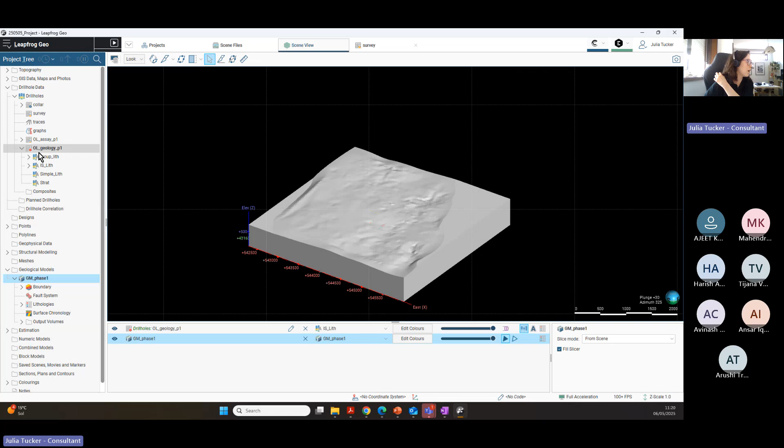We have seen yesterday that we can input our data and then we can start to visualize it. And by the visualization, we can also find a bunch of mistakes. So we can see that we have a problem, an error that is being called right here in the OL geology. If we open it, this error is attached to the lack of information right here.

So for us to take a look here, we can just unvisualize the GM phase 1, or we can take it out. So if we come closer, we can check out that our problem is on our drill hole OL14A. You can just click here and you will see that it's the OL14A. And what we know about the OL14A is that it's the one where we also had fixed the survey. So the problem is about the lacking of data right here.

But we can also see that this is a survey deviation that is not making sense along with the other deviations that we have. So we are going to take a look directly on the survey. Opening the survey right here, we can see that there is a segment from the OL14A that was ignored. So we are going to untick it and save it.

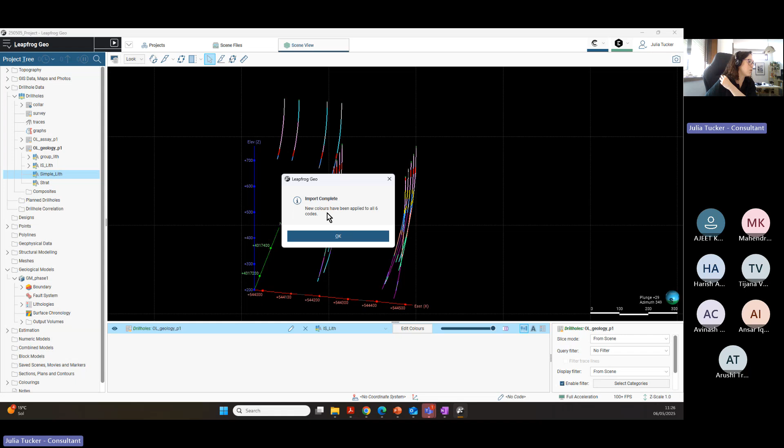Now we have new colors imported, and we are going to do the same for the simple lithology. So we are going to right click on simple lithology, colors, and import. And we are just going to click on simple lithology and open. Import is complete, the new colors have been applied to all the 6 codes.

So what that means, you could see right here that we could also export it. So if I had settled a right pattern of colors that I wanted, I just needed to come right here, right click on it, export it, and then I can move that along with my project. So if somebody wants to have all the same visualization as me, it's possible and pretty simple to do.

So now that we have checked already what we have here in terms of errors and grouping and selecting, now we are going to finish our interpretation because we have now finalized all of the drill holes, and we just need to see on the legend what we have and change right here to the stratigraphy, editing the colors, make everything visible, and just clicking on the OK.

Why? Because now we are just going to click on the cylinder. And by clicking on the cylinder, I also wanted to mention that we can select categories, select the line radius. So let me change this for you to understand what is changing. You can see that the radius of this cylinder is way bigger, and this is some of the functions that we will have for this kind of visualization, to make you understand better your data.

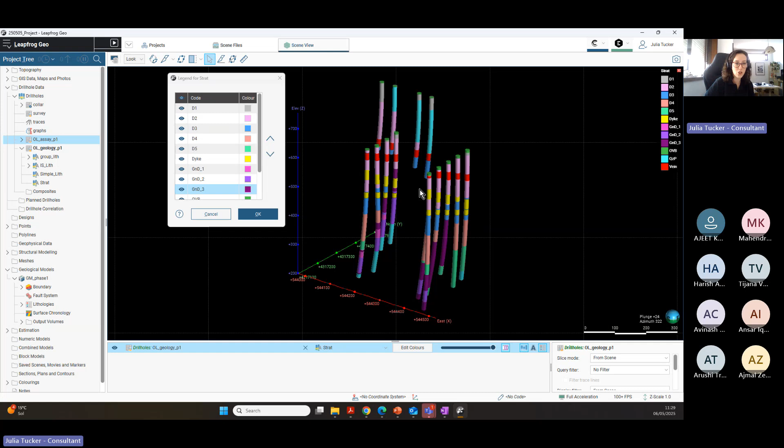So we know that the granodiorite should be together. So that's why we have already advanced to our new lithology, that is the grouped lithology. And now I'm just going to insert everything for visualization. Always remember to do that when you are dragging back anything from your view. Why? Because if you or another person is going to open it afterwards, it may not have the full visualization and keep wondering why, and it's going to be just a matter of viewing.

So just clicking on the OK, because now we are going to take a look at the grouped lithology. Why? Because we have here the grouped lithology, that is our model already interpreted, if we look this way, interpreted by the granodiorite. So we have done a step that was interpreting one group of lithologies. If we wanted to group another lithology, we would do that in the same column.

If you don't remember what I have done yesterday to group that, we just came right here to the geology, new column, and group lithologies. So if I click right here, I would just need to input the source that I'm taking from, and we could group this lithology. So after that, we have checked the interval selection. And why is the interval selection important? Because now that we are seeing the grouped lithology, let's just take a look at the colors again.

Why? Taking off the overburden. What is the overburden? The overburden is this first layer. So we are taking off the overburden just to understand that the youngest lithology that we are seeing here is the overburden. And this information is important. So be aware that if you are trying to do a new model, you need to interpret your data also so you can build what makes more sense.

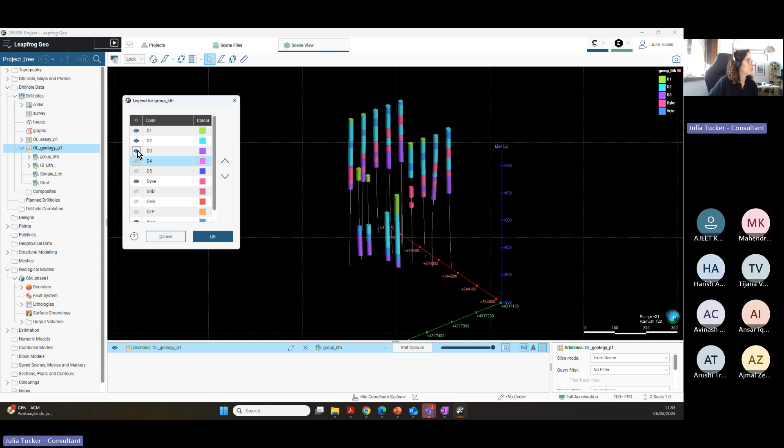And now we can just take out the granodiorite because we know that was already interpreted. And now that we have taken out the granodiorite, we can take out the stratigraphical sequence that we have here. That is the D1, D2, D3, D4, and D5. And what we have when we got this, we have a vein and a dike.

The dike I have already mentioned yesterday, this dike right here, it will need to be split, right? So when we are talking about a modelling that will need the dikes to meet, we are going to model it as two veins in a vein system. So this vein right here is just a single vein. And this one right here, we are going to model as a system of veins.

And how we are going to make the program understand that we are doing these two different dikes, we are going to do that by the interval selection. So now I'm just going to take everything out here because we are going to open the interval selection. So when we right click on the interval selection right here that we created yesterday, we have our toolbar again of selection. So what we are trying to do here is just to select what we want.

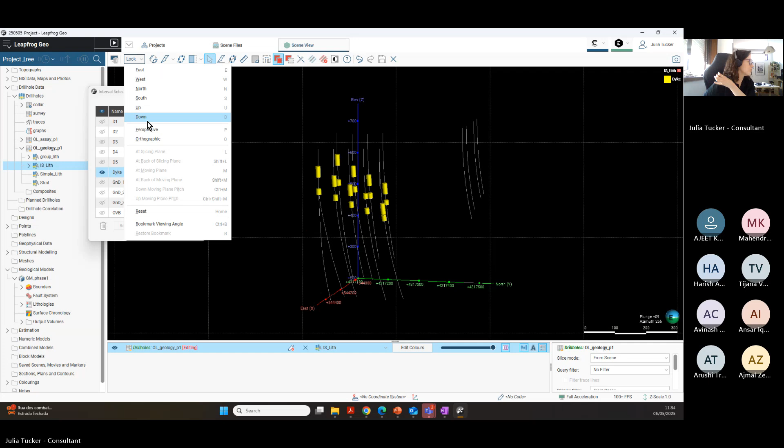So to do that, let's just visualize what we want. And we are going to visualize just the dike. So we have here the dike. And what we are going to do now, just pressing D, we will be able also to make a slice. So I had pressed D and now I am drawing a slice. So on my slice right here, I can see exactly what I wanted to select.

So what am I going to do? I am going to click on the selection by line. So I'm going to select these intervals by line. So I'm going to select this, this, this, this, and this. You can see that this is a straight line. So we had selected. After selecting, we just need to come right here, assign to.

We are going to expand the assign to, and we are going to create a new lithology. And this new lithology is going to be called dike 1. So the vein of dike on top is going to be our dike 1. And we are just going to click on the OK. And now that we have selected the dike 1, let's select the dike 2. Now, the same process, assign to, create a new lithology, and this one is going to be the lithology dike 2. And we are just going to click on the OK.

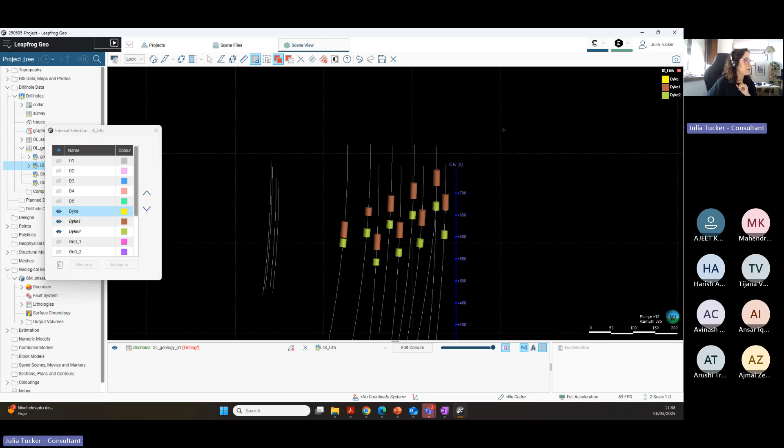So before I save it, I just want to be clear that everyone was able to select the two bodies, and there is no doubt on the toolbar right here that we are seeing. So if you want a wider line, you could just press right here. So just carry on. We just need to save it. So now just saving it, and we can see all the visualization again.

So now what we have right here, we have a simple little grouped interpretation lithology. And this interpretation lithology right here has two different dikes. That is what's important for us. So this interpretative lithology right here has our two dikes. So is there any doubt until this moment? I just want to be sure that you are all following along.

Yes, Julia, so hi. Yeah, it's fine till now.

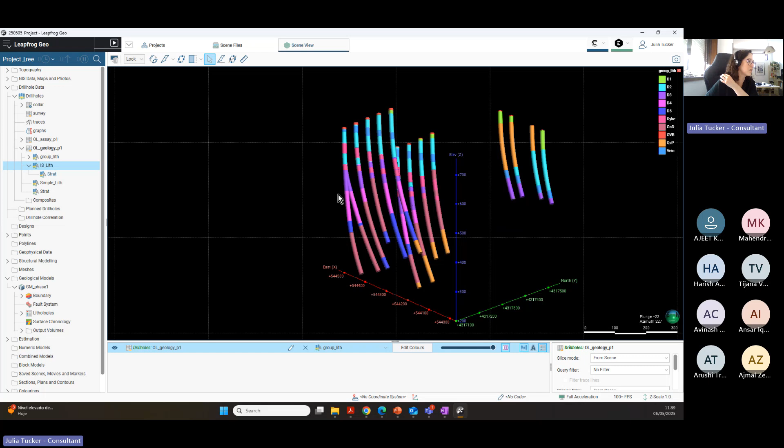Okay, so now you have realized that we did a grouped lithology, and on this grouped lithology, we had our granodiorite together. And right here in our interpretation lithology, we are not having it anymore. So how could we fix that? We could do it over again. So we can do a grouped lithology and afterward do the interval selection all over again if this is what we want and this is the result that we are trying to get.

So we are just going over here because the stratigraphy, the interval selection right here, oh, sorry. This is something that I wanted to mention with you also. You are going to have in general 24 hours for your connector. So it had opened here for me to make the selection again because it had reached exactly the point that we had started yesterday using the license. So I just need to input here the get started and done. We have here our software open again.

So now let's come back to what we were talking about. The interval selection that we have done right here is based on our pure stratigraphy. So that means that we don't have our granodiorites grouped together. So let's do it all over again. We are going to delete the interval selection to redo that. And on the grouped lithology, we are going to take a look and see if our granodiorite is totally together. We take the visualization of everything and input the visualization of the granodiorite. So we have this already done, and we just need to click on OK.

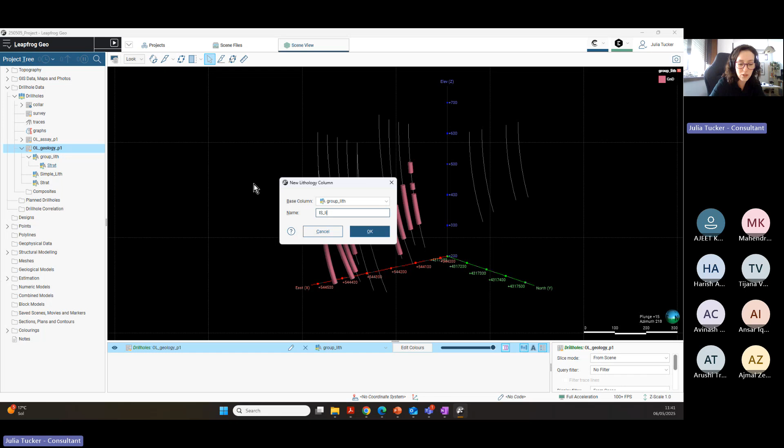So on the OL geology, we just need now to do the new column, in this case the interval selection with the base column being the grouped lithology, and the name is still the same, the interval selection for the lithology, where we are going to make the selection of the dike. So this is another opportunity for you to do the interval selection of the dike. Why am I saying that?

Because I know that it sounds pretty easy when I'm doing it here, but this is something that you need to practice a little bit. After you get how to do the selection, you will see that this is way easier than QGIS or any kind of GIS selection tool. You just need to practice the slicing because we are seeing everything in a 3D environment. You need a certain practice to understand, when you are drawing something, what is happening to this drawing, what is actually splitting or not splitting. So that's why we are going to do this workaround about the interval selection all over again, because you're going to use that a lot of times.

So what we had to do right here to start our interval selection: see only what we want to select. What we want to select, the dike. So now we have these two sets of dikes, and we know that the first one belongs to one body and the other one belongs to another body, that we want to be veins that are bifurcating from the same place.

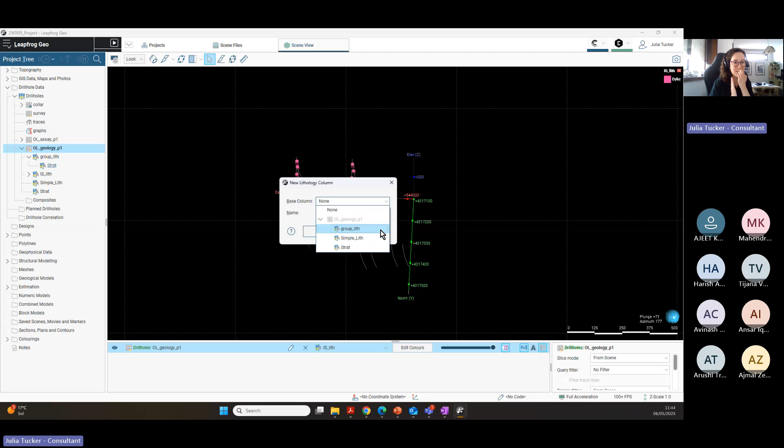Actually, license expired. Sorry, I have to start again. Yeah, it's the same. That's what I was showing you. We will all get this at the same time, because it's made for one day and to be renewed by day. So yes, we are going to get the expiration all at the same time. I just received it now. You will need just to open the connector. Yeah, I'm trying to open it again. No problem.

While you are opening there, I'm going to carry on with the interval selection, but we can come back because I think that your problem was right here. When you were doing the new column for the interval selection, you probably had put on the base column just the stratigraphy, and we need the group lithology. So, we can continue.

So if you double click on the interval selection right here, how are we going to see just the dike? It's here, this little eye. Are you seeing? We untick and we can see everything at once, but we are going to untick this and just tick the dike because we want just to see the dike. Were you able to do that part?

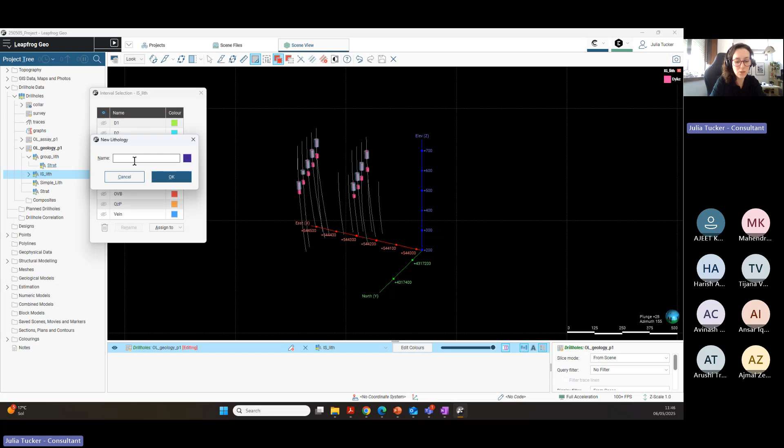But if you want to do that in a more conservative way, take a look north—oh, down, sorry, you are seeing down. Now that you are seeing down, you want to split your vision. And right here on the slicer, you can see you are just removing the front.

So you are coming back to your project, looking at east, and just select what you want, remembering that what is on top is going to be dike 1 and what is below is going to be dike 2. Now I'm going to assign it and it's going to be dike 1. And just click on OK.

And now we are just going to change this view from remove the front to remove the back, and we are going to select our dike 2 again. So after we've done that...

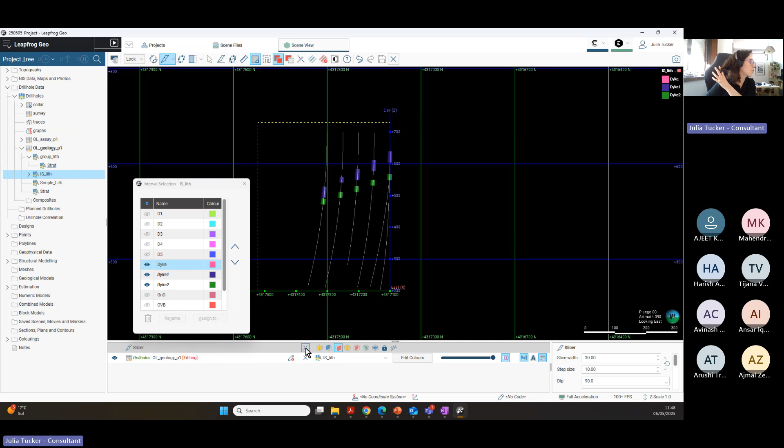Now we can see that we have what is necessary for us to be grouped, and we have what is necessary for us to be split. Now we can actually start our surfaces. This is a very important part to start our geological model.

As I showed yesterday, we need to understand how our model is separated into surfaces. So the base lithology column right here is going to be the interpreted lithology. The surface resolution we are going to leave at 30. The enclose object is going to be the assays.

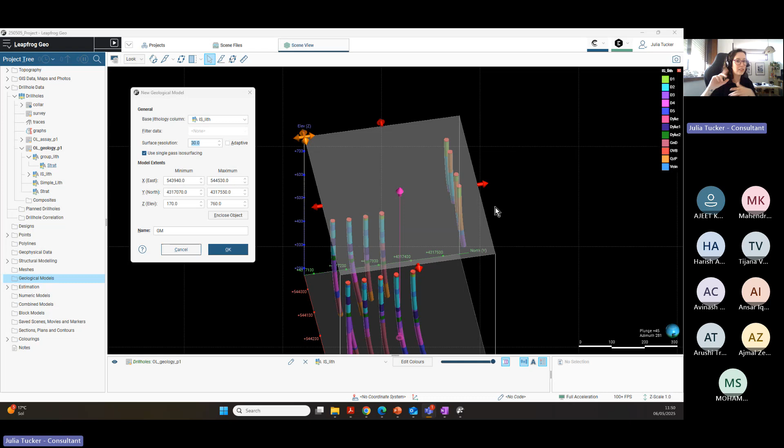So what we are seeing now is that the assays are the boundary, really close to our data. This is the best way for you to start modeling, because when you're starting, you are going to do several surfaces that are first pass surfaces. The closer you are to your data source, the easier it's going to be for you to understand and interpret if the program is taking the right direction.

So we have already set our surface resolution to 30, but now we just need to check: does it make sense for us to set a resolution of 30? How much space do we have in our lithologies?

So yesterday we constructed this new geological model. If you have not changed the interpretation here as I have done, you will still have the geological model—it's basically the same. We have to choose a base lithology column, and this decision right here is very important.

So we have already made a lot of new characterizations in our lithologies for us to be able to model it better. What that means is that it's no longer just the stratigraphy, it's the interval selection lithology—the one where we grouped the granodiorites and split the dike.

So the surface resolution right here we are just going to leave at 10. One thing very important to mention: every time you reduce your resolution by one, you increase your processing time by 4. So the ratio here is 1 to 4—one unit less on your resolution means 4 times more processing.

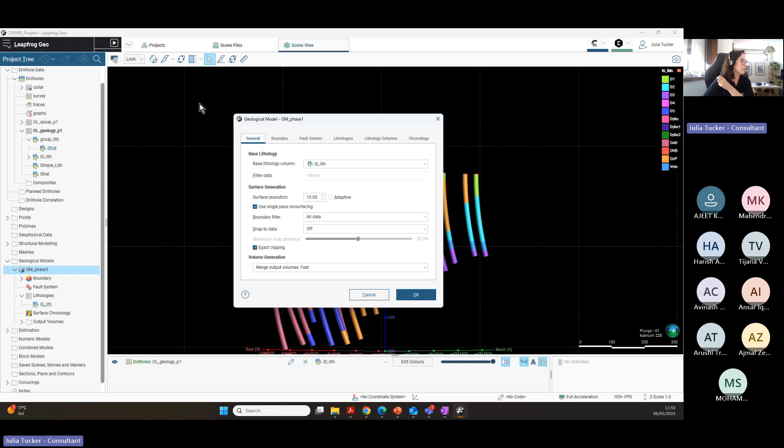You can see that our lithology right here is our interval selection lithology. That was the one we have selected for our model. If you double click on top of your model, you will have this window right here, and this window is extremely important.

We are going to start doing our surfaces, and they have to be chronologically correct. That means we are going to create surfaces, and then input these surfaces in the right order. If we have a background lithology, we are going to insert it right here, and if we need to change it, we use these two arrows right here.

So the lithology columns are from the interval selection. The lithologies are the ones we have checked. We have dike 1, dike 2, and the granodiorite all together.

We don't have any fault systems, but it's important to be aware that if you have a fault system, you could insert it here on the meshes. We could start as a polyline if it's marked on a geological map, and then go from meshes and call it a new fault.

It could be from a polyline, from base lithology, from other contacts, from GIS vector, from points, or from structural data, so if you have structural data on disks, or from a surface. Those are the several options you have to insert a structural system into your geological model, but we are going to start with our surface chronology.

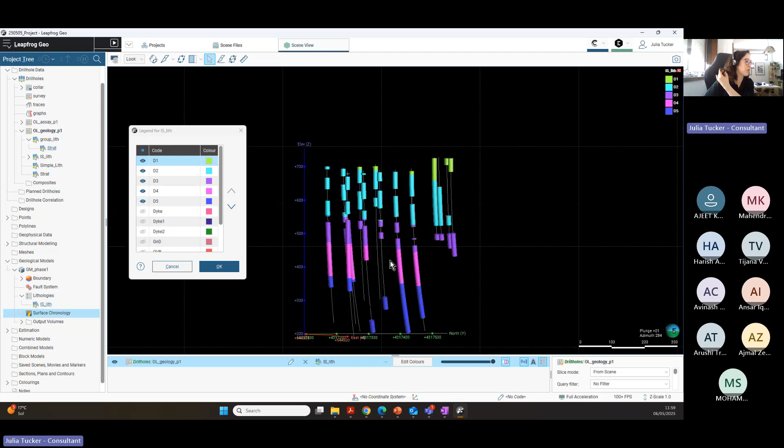Now let's talk a little bit about the golden rules that we have for modeling, and after that we just need to start. So the tips I would have for you when modeling in Leapfrog, first of all, these rules are very important to be followed. If you don't understand any of them, just ask me again, because if you don't follow them, you will have problems in the future.

So it's the same thing I was telling you about the errors. You can ignore the errors for a while if you're just trying to follow your workflow, but be aware that at some point you will not be able to carry on anymore. You have to sort out your first errors. So these are the tips we have, the 5 tips we have so we don't make errors in the surface creation.

First of all, do not generate duplicate points during the modeling process, as this will likely result in erroneous models. We'll discuss this in more detail, because when we are constructing the surface, it's possible to see how many points of contact they have. But why is this important?

Because when we are working in an environment with intrusive, potentially cross-cutting units like veins, dikes and intrusions, it's very helpful to start building your surface from the youngest to the oldest, so the cross-cutting relationships are honored. By building the surface from the youngest to the oldest, we avoid generating duplicate contact points. So following this rule is very important.

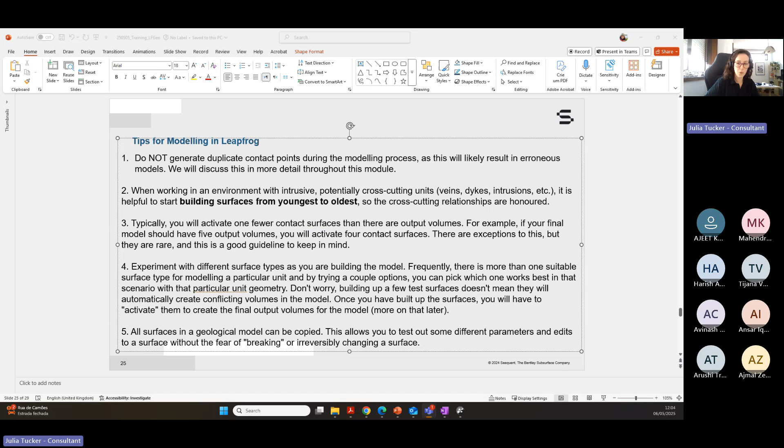Please tell me if you have any doubt. Sure, Jimmy. Oh, sorry? Sure, I said okay, sure.

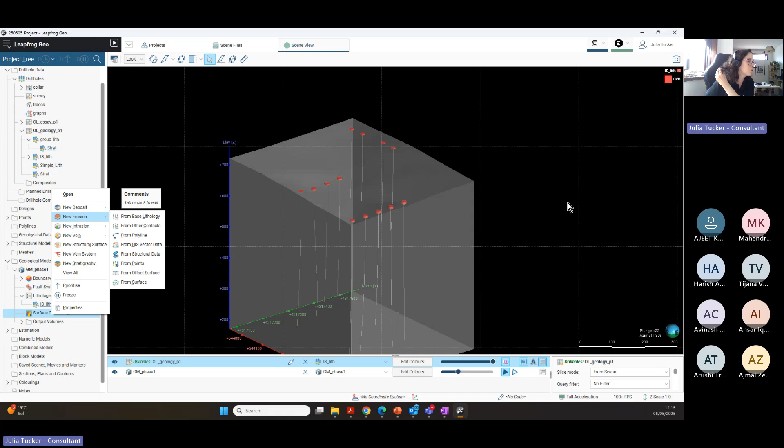So since this is an overburden, we could create this also as an erosion. If you want this to take a little bit of the other lithology that is coming previously, we could have done it with erosion. But we are going to build here just as a deposit. I'm just thinking if it's going to make more sense as an erosion. We are going to build as a deposit from base lithology, and our primary lithology right here is our overburden. So we are going to input overburden and select use contacts below.

So right here, you can check the amount of contacts that those lithologies have with the overburden. So we don't want to duplicate those contacts anymore. We could input lithologies on the ignored list if we don't want to make contact with those lithologies anymore, but we need them, because the overburden is really on top of everything and it's really making contact with everything. So we are just ticking the use contacts below. This is an important part. Be aware of use contacts above or use contacts below.

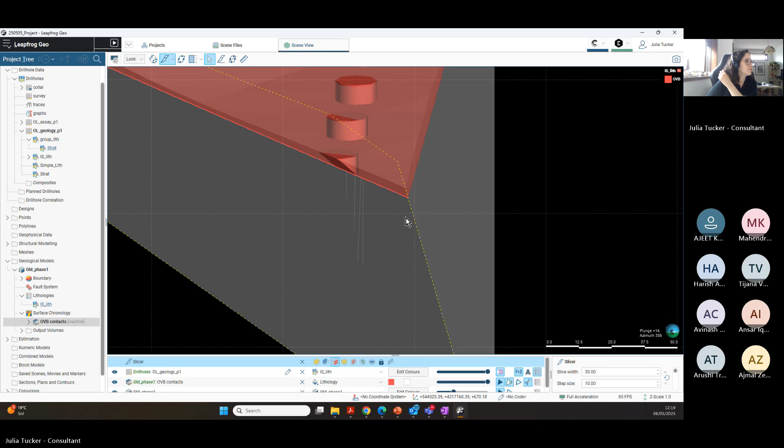So now that we have our overburden contact done right here, we could just import it. So when we import, just drag and drop, and we can see. So we can see right here, and we can try to get the slicer, and we can see right here that we don't have actual snapping to the data. It's way too little for us to see this way, but we could check.

So let me take out the slicer, and we can see maybe better here and right down here. The contact is not fully being respected. So what we are going to do so the contacts are respected, we are going to go to the geological model. We are going to double click on it.

And when we double click on it, we are going to go for snap to data. And our snap to data is going to be drilling only. And why drilling only? Because we only have drilling information here. If we want this to be based also on polylines, on editing tools that you have used, you can also input all data. But in our case, drilling only, and the maximum snap distance of 50 is okay.

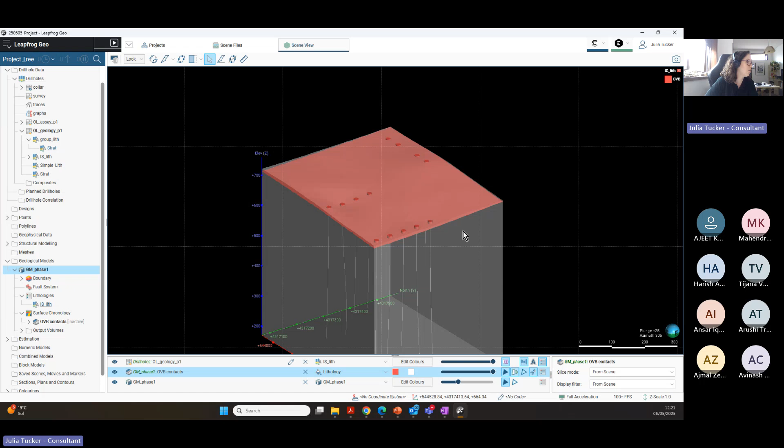If you want, you can input 100, and this way it will be more accurate too. So let's just input 100. The processing time is going to be a little bit longer, but at this moment our model is not that heavy. So we just need now to click on OK, remembering that the surface resolution is 10. So clicking on OK, and now we can see that we have everything way straighter. So let's just check the possibilities that we have right here.

So when we create a contact, we also create those little middle points of the contact that are going to make it easier for us to understand what is the middle point of it and if our surface is respecting our data right here. So these are the contact points. And we can also export all of those points and check the properties of it, seeing how many points we have, how much was the processing time of it, and who created it.

So if you are checking a project that you have a bunch of people collaborating on, and you're not sure who was the one that was actually creating all the features on Leapfrog, we can go to the properties and take a look at the history and see who was the one logged on the account at that time and what time exactly it was.

So now I'm just going to clean it all, cleaning all my screen because we are going to carry on. So you can see right here that this is in gray showing inactive. So for making this active, we just double click on the geological model on the chronology. But we still don't have all of our surfaces done. First, we will have all of them done, and then we will activate everything in the right sequence.

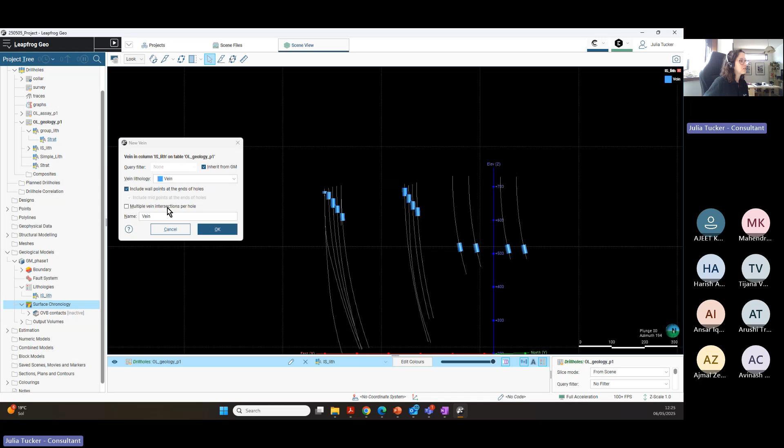So in our case right here, you already know we are going to get this from our base lithology, and in our case right here, our vein lithology, it's going to be the vein. So we are going to include the wall points at the end of the hole because this is important for us. But we know that in this case right here, we don't have multiple vein intersections per hole. So we don't have any kind of problem right here with folding veins.

So why do we have this option right here, multiple vein intersections per hole? Because we can have a fold, and this fold is going to pass more than one time in the same drill hole. If you want to project a fold geometrically, you can start visualizing that in Leapfrog too. So once you have already set the vein, we are just clicking OK.

And now we are just dragging this to the scene view so we can check how our vein is. So our vein is respecting our system, is respecting our surface, is respecting our overburden. And if we input the overburden and the vein, we can see right here the encounter of the two of them. And if we want to check if it's making sense, we can just see that with our data too.

Remembering this is just the surface. When we are creating the surface from a vein, we will have more options. So let's just take a look at the options that we have for the vein. So if we go here in the project tree and just expand the vein, what are the options that we have?

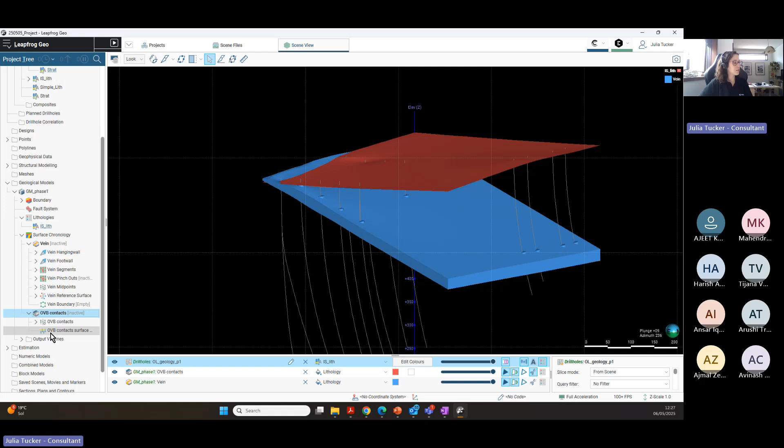If we compare right here, you could see that for the contacts on the deposit, we just create some points, and those are the points of contact and the surfaces created by those points. So if you want to edit these contacts, you are going to do it basically by the contact points. If you want to edit the vein, you will have several options for it.

So at first, I just want to make everything clear, but I'm not going to take everything out, just the overburden, because I wanted to show you a little bit what every one of those icons means. Why? Because they are important for you in advanced editing. So if we check right here, we have the hanging wall.

If we right click on the vein hanging wall, you can see that you can add more information to it. So if you have a hanging wall that you have more information on, you can do a first pass surface right here, and you can add points, add structural data and add polylines to make your surface exactly the way that you want. Also, you can just edit it. So we can call up the editing here.

We are going to have exactly the same toolbar that we have for the interval selection. And this way we will be able to create a polyline that will cut our hanging wall. We can also do the evaluations on the hanging wall and extract structural data from it. I just want to mention that everything is going to be exactly the same for the vein footwall. And one thing that I wanted to visualize is this. Let me just put a bit of transparency on the vein.

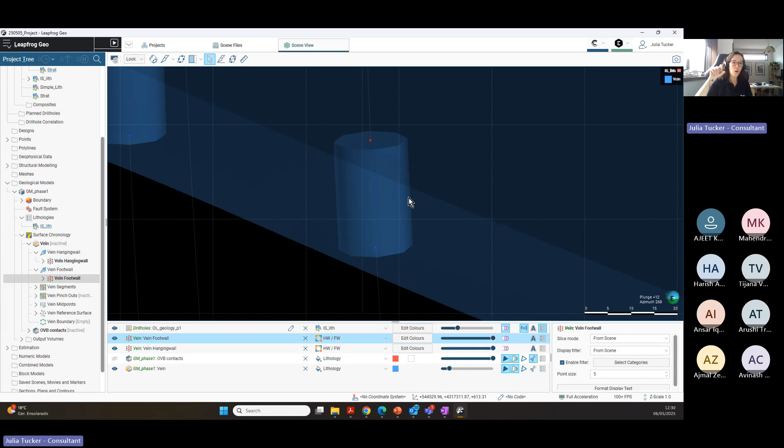So if this is folded, remember that this is the way that you are going to tell the program that this is folding. So if, for instance, you have two intersections right here, we would have to input the footwall, the blue, on top and the red below if we want this to make a fold. So just explaining here a little bit, this part that I'm saying right now is advanced editing.

So generally there are two kinds of courses for Leapfrog. We have one that is totally fundamental and one that is totally advanced. What I'm trying to do here is to merge those informations a little bit for you, because I think it's very important for you to already be aware of how you can do advanced editing of all of those surfaces, because it's pretty easy to do that. And as you can see, it's already available for you.

You just need to expand the vein and take a look at what you have right here. And what you have right here is pretty easy to understand too, because you have the hanging wall and the footwall.

If you are having any problem understanding, just activate your legend, which makes clear that the hanging wall is the red one and the footwall is the blue one. And if we want, we can also do the pinch outs if there is any pinch out in our vein, and also the vein midpoints, the references, and the boundary.

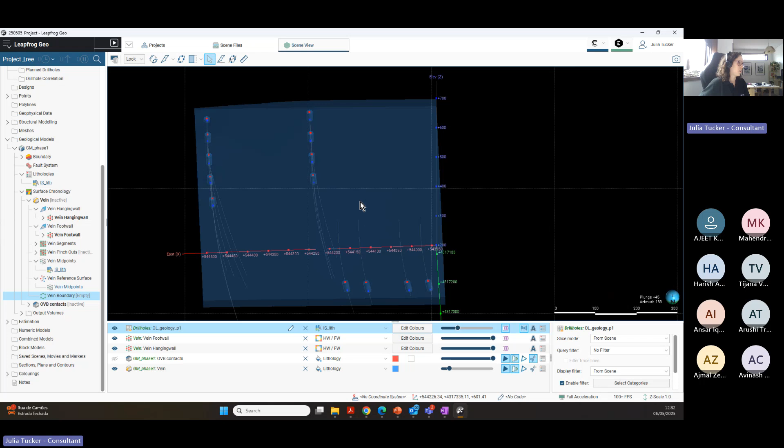Why the boundary? Because the boundary can be very important if you want to constrain this vein to a specific place. So if you come here on the vein boundary, we can also edit this with a polyline. We could draw a polyline here to indicate where we don't have data in our vein if we want to. For instance, we could edit with polyline, and clicking on that, you can see that something very similar to the editing appears, but this time we are just drawing a line.

So how are we going to start this? We are going to start right here, draw lines. Sorry. So if we are drawing a line, we can just come up here and click on D, so you will understand exactly what you are seeing. In this case, I'm just going to take out some of the things that I'm not using. I am not using the overburden contact, and we can just create any polyline if we want, and this is going to be our boundary afterwards.

I just wanted to mention that this is pretty simple and easy to do. If you need to keep your information pretty close to where you have the samples, this is the way you are going to do that. Afterwards, you just need to save it. I'm not going to save it because here it will be nice to have the total volume. But if you want to cut this, just save it and you will have it on your boundary. And you can also take this out if you want, just going to the boundary, right clicking and delete.

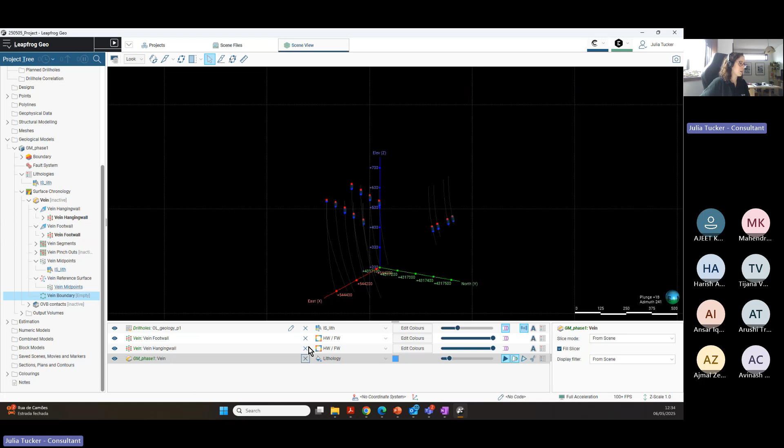So now that we have already taken a look at our vein, let's take a look at our next veins, because we have seen that we have two youngest: the dike and the vein. It will not matter whether we do the dike or the vein first, but we need to do the dike now because it will matter to do the dike before the other ones. So I am going to collapse our vein and also our drill hole data. If you find it easier, just come here and collapse all the rows. If you want to use the shortcut, you can do Control Shift left.

Now that we have our geological model expanded, our surface chronology, we are going to right click and create a new vein system. The vein lithology that we are going to insert here is the dike, and the outside lithology is unknown. Why? Because there are a bunch of lithologies here that could fit, so we can just leave it unknown. We just click OK, and we have a Dyke vein system. It's empty and inactive, meaning we don't have anything drawn on it, and it's not activated in our geological model.

Now we want to take a look at it, just by looking at our data. I had inserted a transparency here. Now taking out this transparency, editing the colors, and selecting just the dike and taking out the vein. So we have the dike separated into Dyke1 and Dyke2. At this moment, we want to build it as two veins, so we are going to build the vein Dyke1 and the vein Dyke2 under the same system.

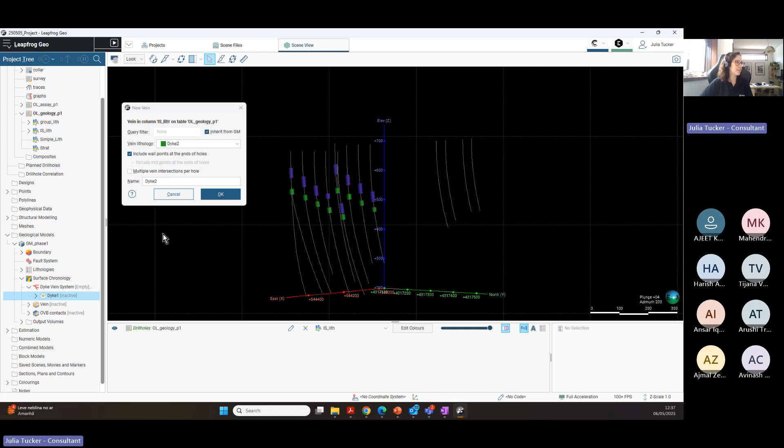So first of all, let's just check the Dyke1, making total sense. And now the Dyke2, exactly with the same configuration, and just doing the OK. So now we have here the Dyke1 and the Dyke2. And we could see that those are interacting with each other, right? So

what does that mean? That means that when we have something that is interacting, is very narrow and is interacting with other lithologies, we are not just building a vein, we are going to build a vein system. Why? Because now I can click on Dyke vein and I can go for the vein system. So when I do that, I can create interactions between those veins.

And this way, I can say that the Dyke2 is ending on the footwall of the Dyke1. So the Dyke2 is ending on the footwall of the Dyke1. So what we could do right here, we could insert this interaction. We just need to click on them, and then click on the plus right here, and we can see the interaction type. And we are just going to expand a little bit so we can check what it is.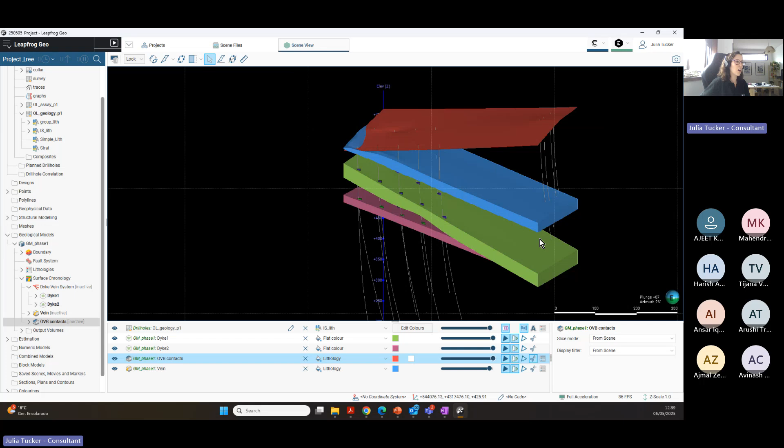So now that we have this right interaction between them, let's just check against the vein that is with transparency and with the overburden contact. And now we are starting to see our model already being completed. So it's already making some sense. And now we just need to understand what we have missing. So we have already done the dike 2, and the vein and the overburden.

So let's take this out. I'm going to take out the vein, the dike, and the overburden. So we can see right here that we have missing the granodiorite and the quartz porphyry and the stratigraphical sequence. I am taking out the stratigraphical sequence right now for us to understand what is coming first, if there is any porphyry that seems to be coming before the other, and it's not. This is another case where we could do both of them. It would not matter if we do the quartz first or the granodiorite first.

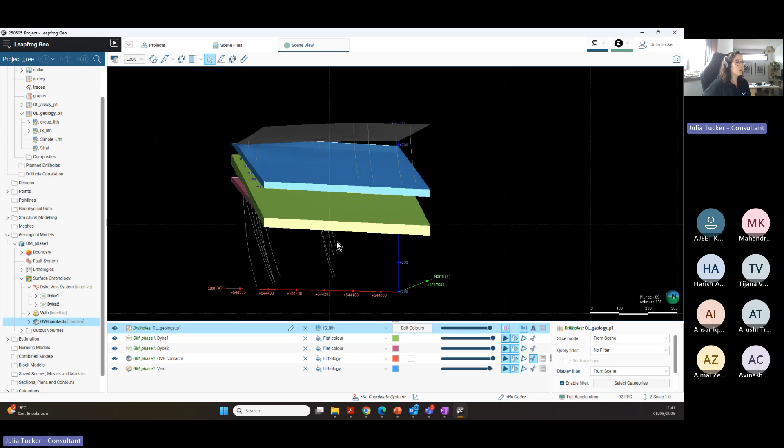But this is to mention to you that we need to take several decisions while we are doing our model, and we need to be smart. We need to think as engineers, as geologists, and take a look at the logic of what we are seeing. So here we have everything already modeled up to this moment, and now we are going to go for our granodiorite to be modeled. So I'm just going to take this out, and we are going to activate just the granodiorite so we can look at how this is modeled.

So we have already done some veins that are not active, but they are cutting right here, and the program has already understood it since we have already done it as the first lithology. We just need to be aware that when we are inputting that on the chronology, we are inserting the vein and the dike system in the same category of importance. So just clicking here on the OK, we are doing the surface chronology now, and it's going to be a new intrusion.

Sorry. So we have here the granodiorite as an intrusion, and we can do this from the base lithology. And in this case, you know what? Hello? Oh, so we are going to start actually with the quartz porphyry, because the granodiorite will be a little bit more important for us. I wanted to show you a little bit how we could make it together with the plane.

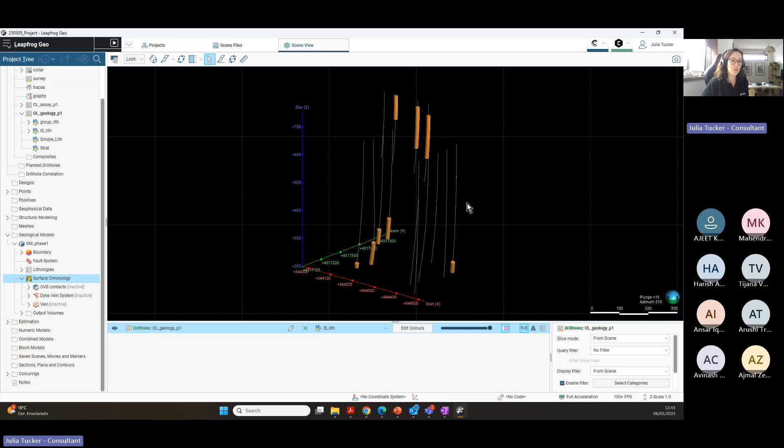So we are going to start visualizing here the quartz, and that's it. We are probably going to connect these two bodies. Let's see what the program is able to do for us in a first pass surface. So we can see that right here we have a kind of data that is sparse. So maybe the program will build just two different bodies, and we know that this is coming together.

So now that we have already understood a little bit about our surfaces, we are going to create our intrusion surface from the base lithology, and this one is going to be the quartz, and the exterior lithologies that we will have, they should not be the youngest one, so we need just to separate everything, ignoring the youngest ones. The newest are the dike 1, 2, the overburden, and the vein. We have everything here, just want to check if everybody's following up. We still have not done the GND, which is the granodiorite, so we don't need to worry about it.

Now we just need to click on OK to check what we are going to have as a first pass surface. This is a point where I wanted to take a little bit of attention, because we have created here two different and separated bodies. So what I want the program to understand now is that this right here, it's connected.

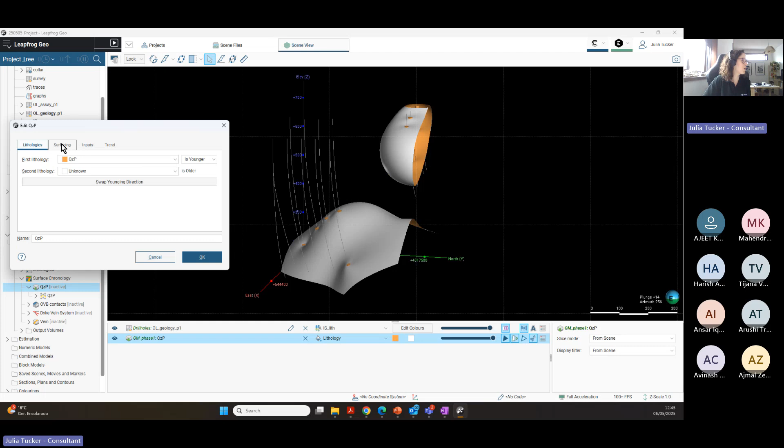So let's explore a little bit the QZP and the options that we have. We can open it, and just taking a look on it, we can see the second lithology. This is not the place where we are going to solve our problem. We can see the surfacing. So if we have any kind of problem with the snapping or how the geometry is behaving, we could take a look on this. We are not going to do that right now.

So we have the inputs and we have the trends. The trends will be our way to deal with that, and we are going to do that by setting a plane. So we are going to set from a plane. We just need now to visualize this plane, and we just need to come right here and start to draw this plane.

What we are going to do with this plane, we will try to intersect it in the most points that are possible. So what we are going to do, we are going to take out a bit our surfaces, because what I'm trying right here is to get everything from my data. So all of my drill holes, if possible, that are intersecting my porphyry.

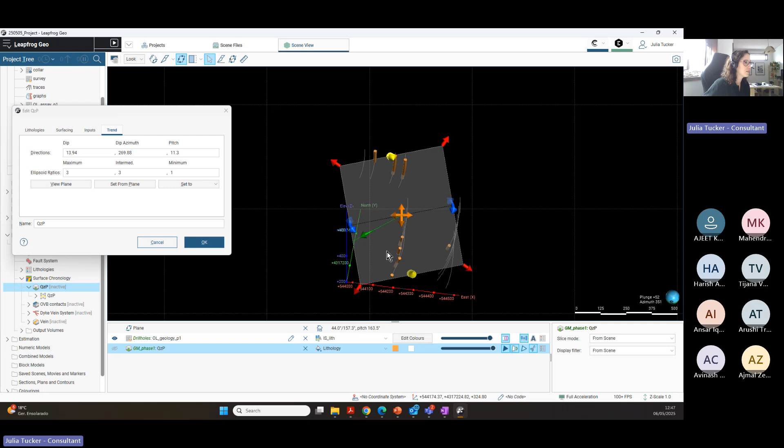Setting a plane is generally the best way that we are going to find to make something in the right direction that you want, because this way I just need to catch this one that it's a little bit lower. So this is the moment where you have to change a bit the angles right here and expand a little bit just to make everything be touched.

So my last problem right here was this tiny little one that is on the right, and now we have everything selected and we can expand it. Just this last one, and now it's almost done. I just need to intersect this last one. And done, now we have everything being intersected.

So we just need now to set from plane, and we have already the plane set. Please just tell me if anybody had any doubts right here. For setting the plane, we can just go right here, or we can come right here and input the set to if you have already a surface that you want to follow. So set from plane is already done, and now we can just click on OK and see the processing, how it's going to happen.

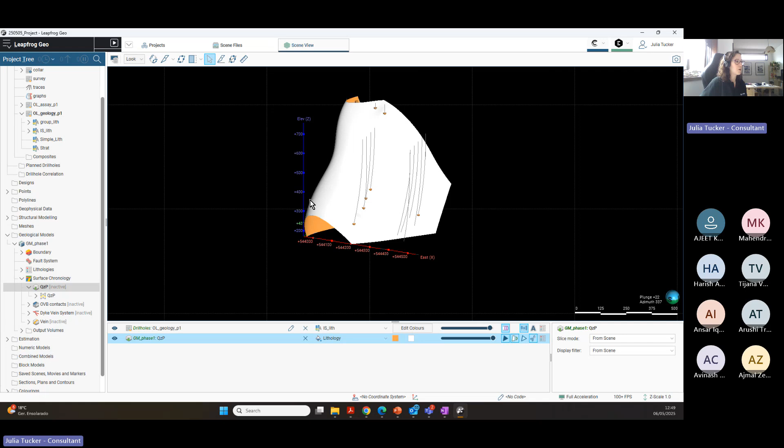So we have here now our body all connected. This was exactly what we were trying to reach, because we want this to be fully connected right here. So this is a whole body.

Now that we have learned how we are going to connect this, I just want to show a little bit the advanced editing. So if you open the intrusion again, we can go for the surfacing and do the additional options. On the additional options, you will have the value clipping and the interpolant. This part right here is more advanced because you need to understand more of the statistics. So you need to understand first of it, the base range, what that means.

The base range is going to be basically the distance between two data points, the double of it. So if you have, for instance, right here, a distance of 60 meters, that is what we have right here, we will have 120 of base range. Our total sill is going to be the same as our variance, and the interpolant is going to be the spheroidal in general, because when we are talking about polymetallic kind of deposits, we are talking about spheroidal interpolants. So the value clipping is also very important. If you want to do the clipping, you just untick this and input the upper bound and lower bound that you want to clip this value.

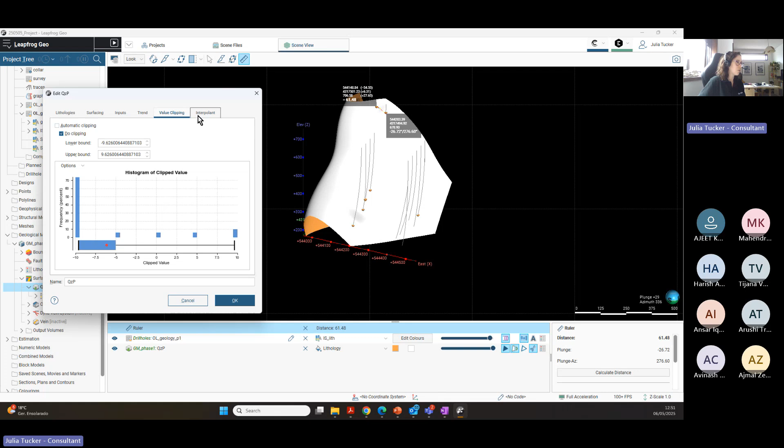This will be very important if you are also changing the interpolant. You can see the value clipping makes a lot of difference on the variance and on the interpolants. And when we have numerical numbers, we will also have the option of inserting the cutoff and other options for us. That will be very interesting for us to take a look tomorrow on our numbers day.

So now just getting on with our categories, we have already done our QZP because I wanted to show you first how we are going to edit the plane. And now we are just going to do the last but not the least, that is going to be our granodiorite.

So under surface chronology, we are just going now for the intrusion again from base lithology. And this time we are just using the granodiorite as interior lithology. So what are the youngest lithologies? Everything but the sequence D1, D2, D3, D4, D5. So we can insert everything here, ignore younger lithologies, and just click on OK.

So now we are going to edit right here on our drill holes because I want to analyze our granodiorite. So I have here, and we could just take out our first QZP and now go for our granodiorite. So in our granodiorite, we'll have exactly the same issue as we had in the quartz porphyry. So we are going to do exactly the same process.

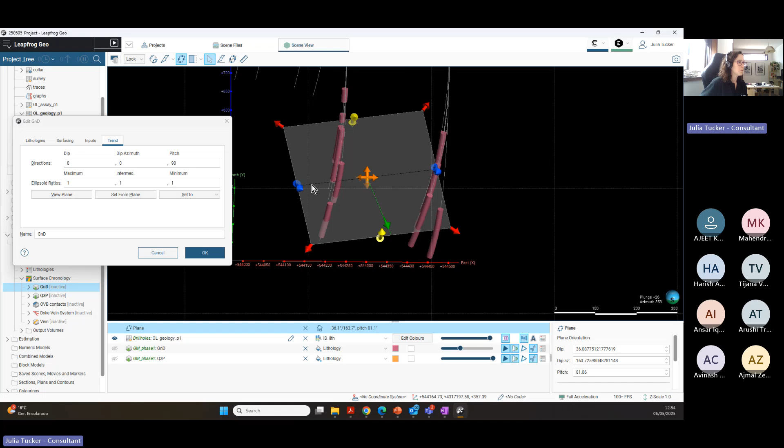Also try to make sure that you are not creating a dip that doesn't exist. So try to follow your data. This part is very important, because if you are doing that but you are not following your data or any indication that already exists, this can lead you to interpret something that doesn't make sense.

So we have intersected everyone here. I'm just going to put this a bit closer. And now we are just going to set from plane and OK. Now let's just take a look, and we have a better looking granodiorite right here.

And now we already have our granodiorite, we have our QZP, we have our overburden, we have our dike system, and we have our vein. What are we missing? We are missing just the stratigraphical sequence. And how could we do that? There are several ways that we could take right now, but I'm going to show you two ways of doing that. I think we should focus on the stratigraphical sequence, because it's one that you are going to use a lot.

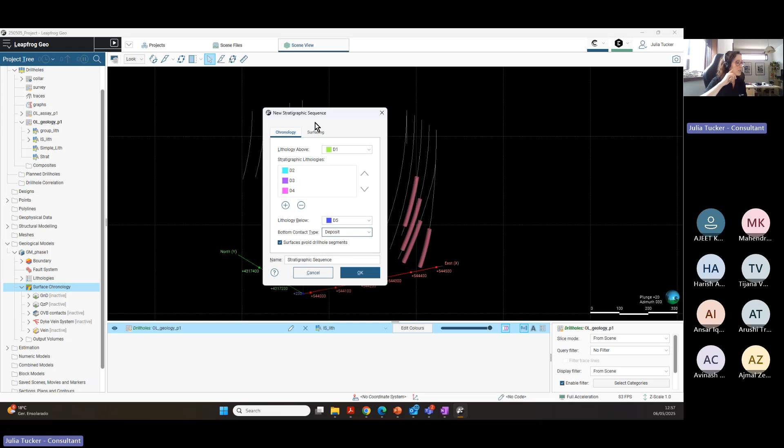Surfacing, we could take a look on that. And now we could also input right here the bottom contact as erosional. I don't want to do that. We can just input it as deposit, but this is something pretty nice for you to be aware of, because if you're modeling a layer cake, you can do that in just a few seconds with a new stratigraphic sequence. So just click on OK.

And we have created here our stratigraphic sequence. So let's take a look on it. So how should we validate that? If you take a look on the colors that you have right here, you should have this D1 color and the D2 color, the D2 color and the D3 color.

And this way it goes on. So right here, I should have just the D5 color, because this way I will not get anything that's unknown. So if you have any kind of unknown basement, you can also add it here. In this moment, you would just input this as unknown lithology below. So just clicking OK, now we have all of our surfaces done.

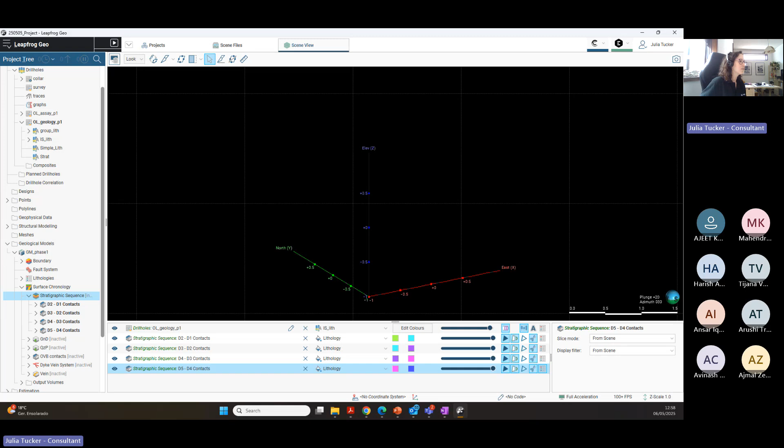Now that we have all of our surfaces done, what we should do is activate them all. To activate all of them, we need to first clean our scene view, which is always good to do, and then we go to our geological model. In our geological model, we go for chronology, because this chronology is going to dictate everything for us.

So the overburden must be on top. The vein was the second one that we have done. The dike vein system was the third one. The QZP was following the dike system. The granodiorite was following the QZP. And the stratigraphic sequence is the last one. So now we are going to tick on everything, and then we are going to click OK.

This way we will be able to start to process our volumes. But first, before I click OK, is there any doubt about any of those surfaces we have created until this moment? Because this moment is very important, because it's when you understand how you build your geological model. We have done the preparation of data, corrected the errors, talked about the surfaces, and we have created and edited them. So they are not just a first pass surface, they are also an edited surface.

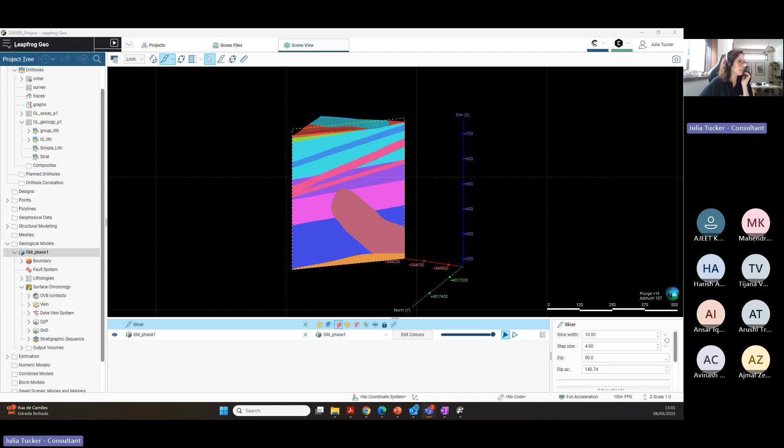So any doubts until this moment? I would believe that this is a no. So we are carrying on in a few minutes, but please tell me if you have any doubts, because this is a very important moment now for us to sort out everything we may have doubts about regarding the construction of the geological model. So if we don't have any doubts, I will just take a 10 minute break. We will come back in 10 minutes. Anything, just tell me please, and we can go back over it when you are all there.

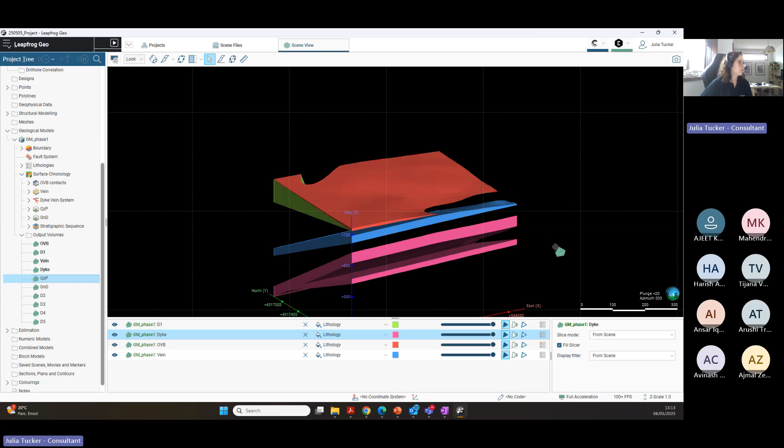In our project tree, we just need to go for the geological models, the output volumes, and on the output volumes - hello - we just need now to drag and drop it to the scene view, and this way we are able to see everything that we have modeled. So we can just take a look at it and see all of the volumes that we have.

What would be our options now that we have our volumes? We can just go on the volume, and for instance, I'm going to take a look at my vein first. I'm going to right click on my volumes, and I have the possibility to do evaluations within my volume, extract the mesh of the volume, extract the vertices - just the points of it. I can export it, I can export as a thickness grid if I want, I can export just the colors, and I can check the properties.

Checking the properties, you can see that this is totally closed, which means I will not have any problems in further processing because this is totally closed and consistent. I have here the amount of triangles, the volume, and the area of it. So what does that mean? That means I already have a volume. If I had here a density, I could already have a grade. I could already have tonnage.

So this is how easy we can get information when we have a good tool for us to use. So here, just closing a little bit, I just want to show you that we are pretending here that we are in an exploration campaign, and now that we have done this first phase, we also need to make some analysis along with this.

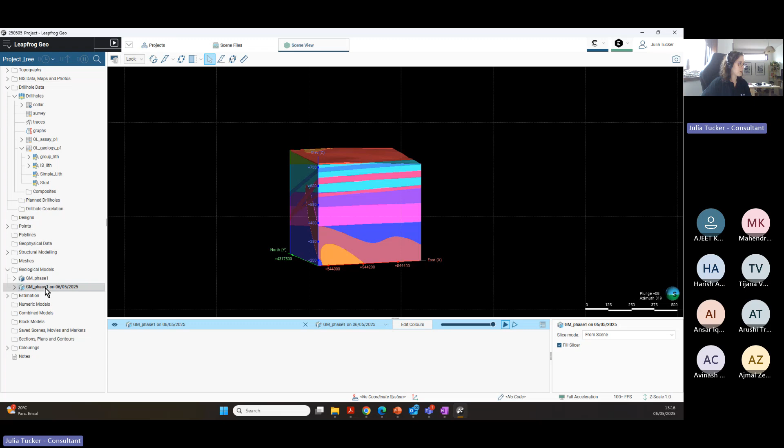So now that we have created a static one, we can take a look on it and see that we cannot edit anything. So on the static version of it, we can take a look at everything. We can make calculations with it, but we can no longer edit it. So that means that if I change the information that was used to do the GM phase 1, I would not change my model right here. So this way, doing a static one, it is not going to change if we reload or

append more information. So now that we have our geological model, let's see what else we have in our little data file that could be interesting for us. So we are going to import from file right here on the drill holes. We are going to import from file interval values, importing drill hole data additional table. We are going to go for the weathering. So we just need to open it, the hole ID, and here we are going to import it as a category.

So we have it right here, and we just need to finish. So let's take a look on our weathering information right here. I am just going to take off the visualization, and we are going to check our weathering. So in our weathering right here, we have mainly three categories: fresh, mixed, and oxidized. So we just need to come right here on the legend and take a look on the fresh, oxidized, and mixed, because we want to model it.

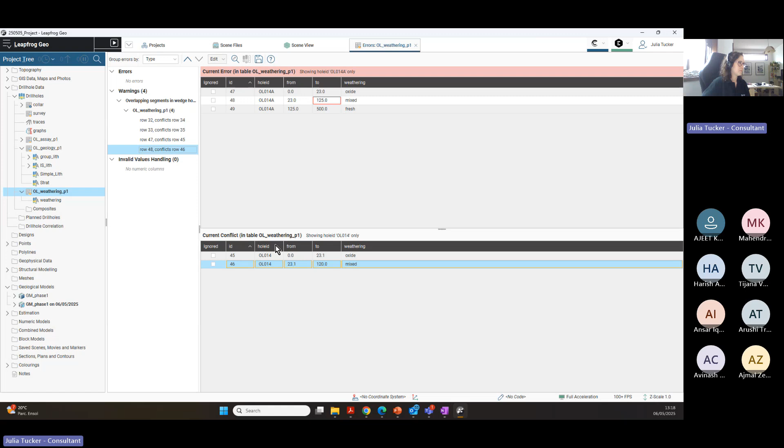And to do so, what should we start doing? So we have this already done. The only thing that we should do is to take a look on probable errors. We have here just warnings. So those warnings don't make sense. We are not seeing the same drill hole. And here, what we should do, we should just come right here in the geological models, right click

on it. We are going to do a new geological model, but this one is going to be based totally on our weathering. So the base lithology column is going to be our weathering. The surface resolution is going to be 10. Enclosing object, we are just going to input our OL drilling phase 1, and we are just going to set here for weathering.

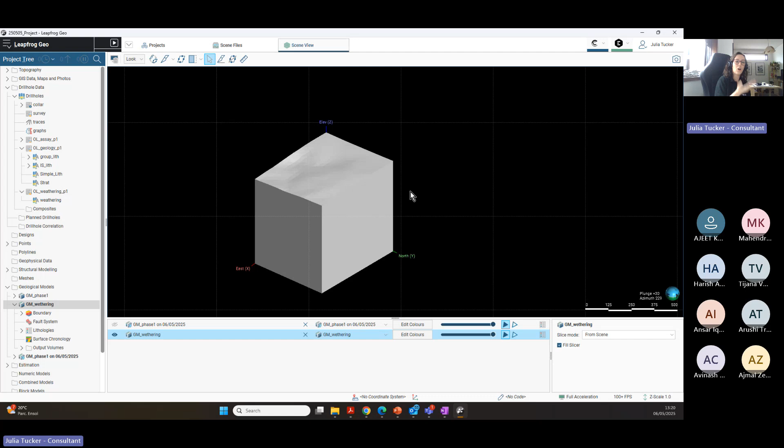And now we can create a weathering model and understand where our surface is more weathered and where it is less weathered, and this will also be important for us in the grades analysis, because we need to have an understanding of what is what. So if you have, for instance, something that is oxidized, or something that maybe has less hardness and resistance than other parts of the rock, you can start there. So this is going to make a lot of difference on your production afterwards, and we can combine those models

afterwards. So following the project tree, you can go and check that we can combine models. So if we do a pit model, a weathering model, and a geological model, we can combine those models, and this way we'll have exactly the amount of the domain that we are going to take out from inside the pit, for instance, or the exact amount of waste that we are going to take out from the open pits. So this is very resourceful for us, and we are going to use it in the next steps.

So now that we have here our geological model for the weathering, we can start by the lithologies, because we know that we have those three lithologies right here, and how we should start modeling it. If we think about it, we need to take a look on our data. And on our data, the oxide would be a deposit on top, like the overburden, and afterwards we will have the mixed and the fresh.

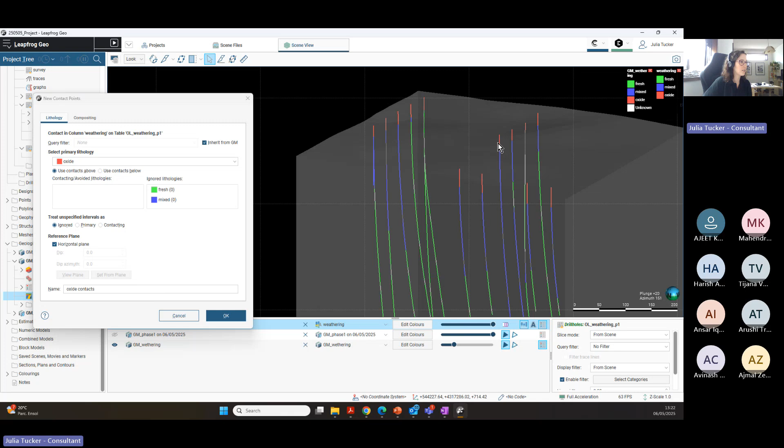do right now. So we are going for the surface chronology, and we are doing the new erosion from base lithology, and it's going to come the first one, that is the oxide. So we are seeing right here on top is the oxide, and we need to use the contacts above it and just click on the OK. And now we have our surface for our oxide.

So now we just need to do our second one, which is going to be the mixed. So to do the mixed one, we are going to use a new intrusion. It's going to be also from base lithology. So let's just click on it. And in this case, we are using the mixed. And the exterior lithologies are going to be the fresh and the oxide. The oxide I'm going to ignore as a younger lithology. And now I'm just going to click on the OK.

And we have right here the surface covering everything that we wanted. So now we just need to activate all those surfaces, and we will have our weathering model also ready. So we just need to go for the weathering model. On the chronology, we just tick everything. The background lithology, it's going to be the fresh, and we just need to click on the OK.

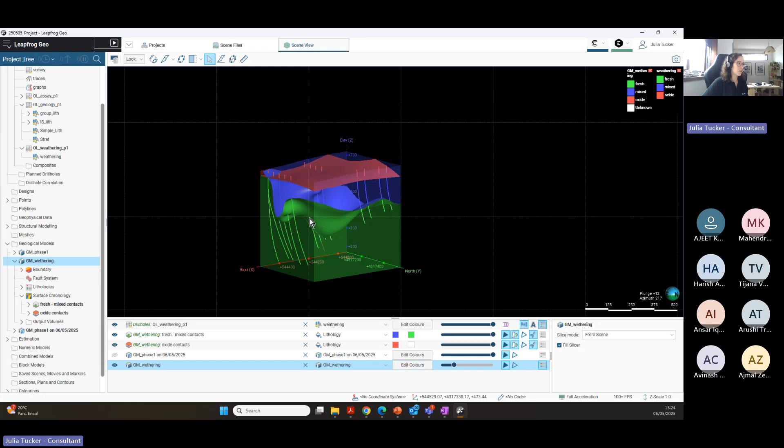So you should have something really look alike mine. If we have some few difference on it, there is no problem. But basically it should be very look-alike. So now I just need to take all these visualizations, and we can take by cleaning everything out and going for the output volumes and calling for the mixed, the oxide, and the fresh. And here we have our little model for the weathering.

So now, just taking everything out, I just want to be clear. Everyone here is following up? We are in the same stage. Is there anybody that needs help to get in the same place as me? Mm.

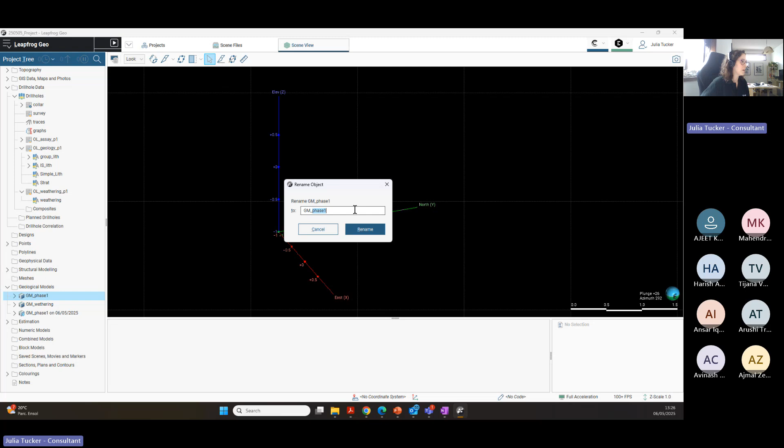So from now on, we are going to start using the extra data that we have, and we are going to update our model. Why? Because we have several options for updating, and we are going to try out. So I have already made a static copy of my phase one, because this right here is just going to become my main geological model. It will be basically the GM geology. So we can rename it.

We have the geology, we have the weathering, and now we can just come right here on the drill hole data, because we may find more data for us in our archives. So if we take a look in our file, the Leapfrog Geo Fundamentals course data, we will have right here the geological modeling dynamic updates. So if we come right here, you will check that we have how to import more information here. So we can start by the weathering. We can just take a look on it.

So if we right click on it, we can append data or reload data. So at first I am going to try to append the data. So we are in the weathering. Right click on it, and we are appending data. So now that we are appending data, we just need to go for Leapfrog Geo, dynamic modeling updates, OL weathering, phase 2, and just do the OK.

So when we are importing more of this data, we are also seeing this little window right here where we can see all the information that we need from the headers. And now we just need to click finish. So we have already a problem right here and we can go for the fix errors. The hole ID is not in the table. So what does that mean?

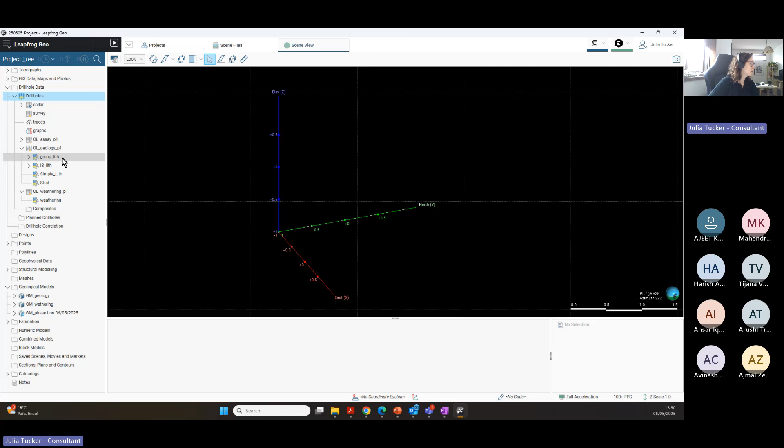So carrying on, now we are seeing that the processing is being done, but we have some analysis that we have done previously, right? So let's just take a look on the group lithology. And on the group lithology, we need to edit the colors and check if we have any other GnD granodiorite intersection that was not grouped, and we don't have it.

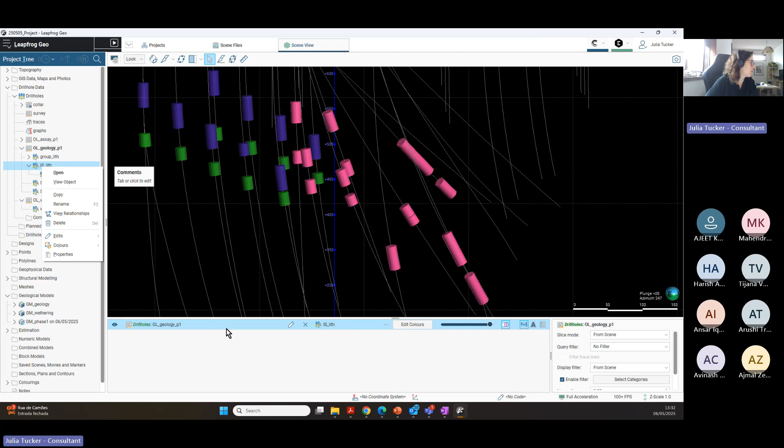So in this moment right here, it's important for us to separate perfectly what we have for the dike 1 and the dike 2 again. And we have already this with intersection on it. So we have the dike 1 ending on the footwall of the dike 2. And now we just want this to carry on. So remembering, when we want to do an interval selection, what we are going to do, we are going to edit. So we just click here to edit our interval selection. So editing it, if you want to stop editing, just click here again. If you want to come back, click here.

So we have here our dike and our dike 1 and 2. So I'm just going to tick out the dike 2 for us to understand what is following the same pattern. And if we want to make a better visualization, we can again do the slicing. We are going to do this slice right here and select what is going to be our dike 1 and our dike 2. So right here, we have our dike 1, and we need to assign to dike 1. And here we have our dike 2.

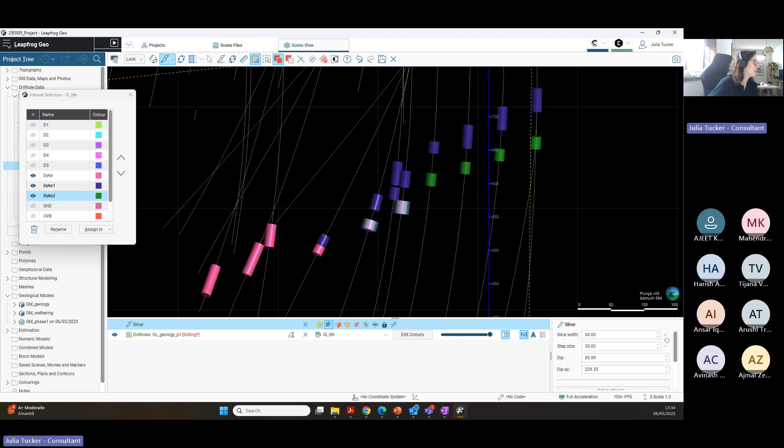So I have done, oh, sorry, I have done it on this side. Now I just need to do it on the other side. So just arriving here, and we are going to select the dike 1 and assign to dike 1, and select the dike 2 and assign to dike 2. So right here, let's assign to the dike 2.

And now I just want to take a further look to understand if those last ones are from the dike 1 or the dike 2. So we have here a misconception. To change it, we just need to go right here, assign to dike 2. And now to understand better, I am going to save it and edit the colors to see the dike 1, dike 2, and the dike. Just clicking on the OK, I'm going to make the slicer now for the bottom.

So we have right here our last segments. And they are following basically. If you want to go a little bit upper with your slice, you can. So just on the slicer right here, we can just go a little bit up and a little bit down.

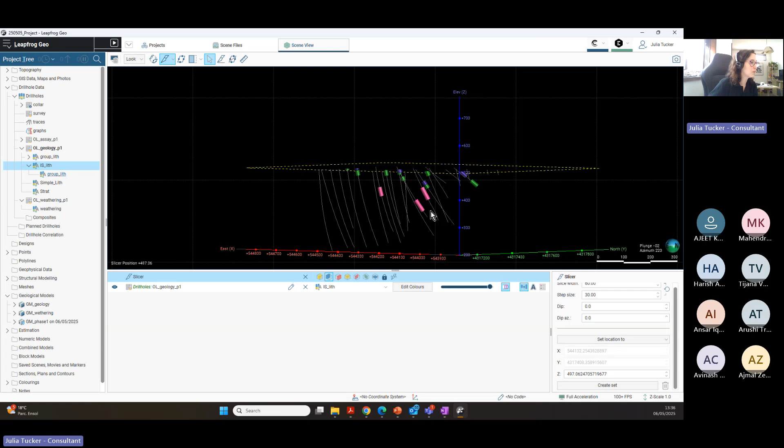And realize that this is making part of our dike 2 maybe. So we are just going for the interval selection right here and selecting it as the dike 2. So we have already our dikes reselected.

We can now untick everything to see if this is making sense or not, if this should be part of the dike 1 or the dike 2, and we can just take a look right now. So if you want to take a better look, we take a look from down and select a place to do the slice. And now that we have the slice done, we can follow from this side to the other side if this is making sense.

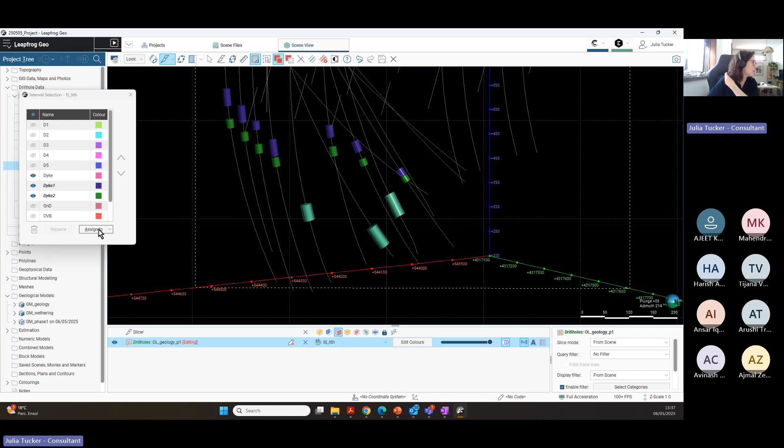So those ones right here, we need to check because they seem to be on the dike 1. So we are just going to open, do the interval selection editing, and we are just going to select it for the dike 1. And then we are just saving it.

All the times that we are saving it, just remember that all of our geological model is also being redone because we have already modeled the dike 1 and the dike 2. Those surfaces already exist. So we are having right here

So just to check, can you hear me? Is everybody hearing? Is there any problem with the audio? Yes, we can hear you. Oh, perfect. No, it's just that you got a little bit quiet, and I was thinking if maybe the workflow is too hard, if you got lost or something.

Please just tell me if you are having any kind of trouble, because now we are really getting into the geological modeling, and I am starting to get with the pace a little bit faster. So it's just to be aware if it's okay. If you want me to slow down or be a little bit more basic, there is no problem on that.

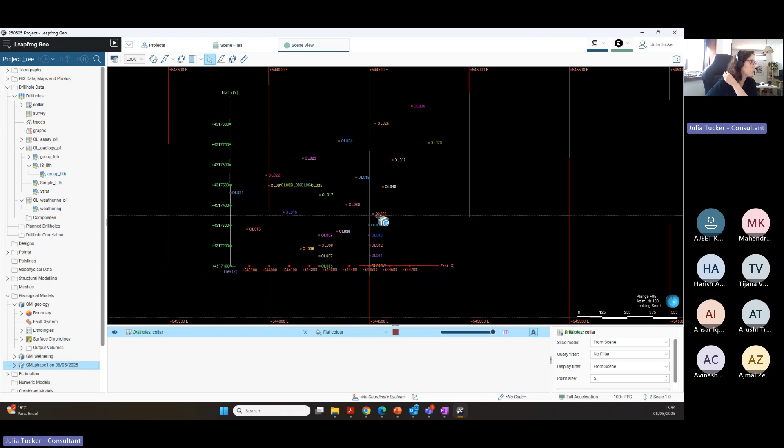So just going further now, we have already selected our dike 1, dike 2, see the grouped one. And now we are going to check out our geological model because we need to set our boundary to our new boundary because we have more information. As we can see right here on the collar, we have way more information, and we can compare now the phase 1 with this new information. And remember, the phase 1 is stored already.

So right here, we just need to go for our boundary in our geological model. We need to open it and enclose objects, but this time to our new collar. And now just clicking on the OK. And we are finding some errors. This is pretty common, and when we are finding errors, we can just take a look on them right here.

So when we have any kind of error related to something that we cannot process, the program will stop the processing, will make it red, and when this happens, we are going to right click on it, and go to the project tree or show the error. So we can go for the show the error. Cannot build a curved reference surface with no input points. So what it's telling me right here is that this probably wasn't the dike 1, this was the dike 2.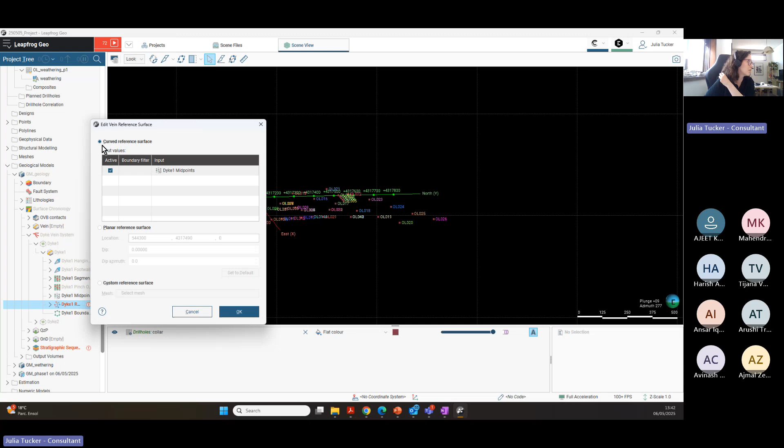So now we have right here our problem 1 with the dyke, and we can open it and see that the dyke midpoints don't make a reference that is curved. So we are going to change this reference because it's not making sense. And this happened when we tried to change our boundary.

So this processing time can take a little bit longer depending on your hardware. Don't be afraid of it. There is no problem since you remember the rules that I have already commented with you. So if you are doing a tryout, the first time, it will not make sense for you to already input a resolution that is going to make your processing way too heavy.

You are doing a few tryouts. So in this moment, you don't need to actually do a super accurate model because you are still trying out, you are doing the processing a few times. So you need to check if you need to control it. You need to be able to control this a little bit better.

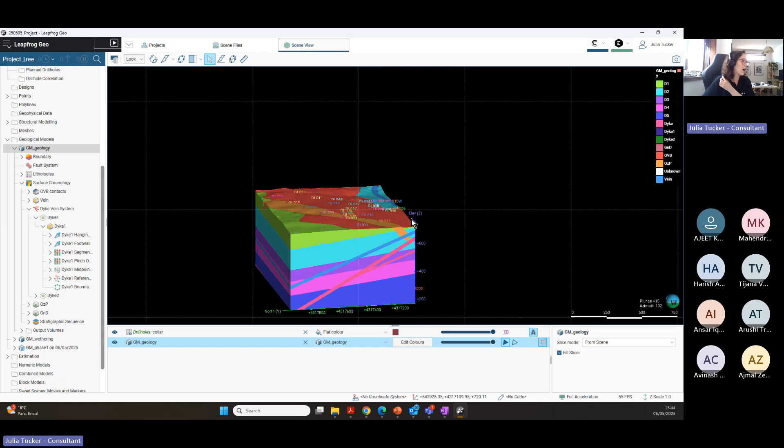So now that we have already processed our new geological model, let's take a look at it. So now we have our geological model exactly expanded for our new information. All of the rules that we have settled are already done. So the first thing that I wanted to mention, thing number one: when we have settled the boundary box, it's pretty common that the boundary box is going to show you an error on the processing. So when this happens, don't worry, just go search where the problem is happening, if the problem makes sense, and if you should change something on the way to make it fit better.

So now that we are here, we can just take a look at it and see how this is fitting better, since now we have selected a boundary that also has the elevation that we needed. When I had selected just the collar boundary, we didn't have this depth. So now we have it. And that's the important part for our processing because we are talking about creating volumes. So now that we have already updated our model, we can compare phase 1 with phase 2.

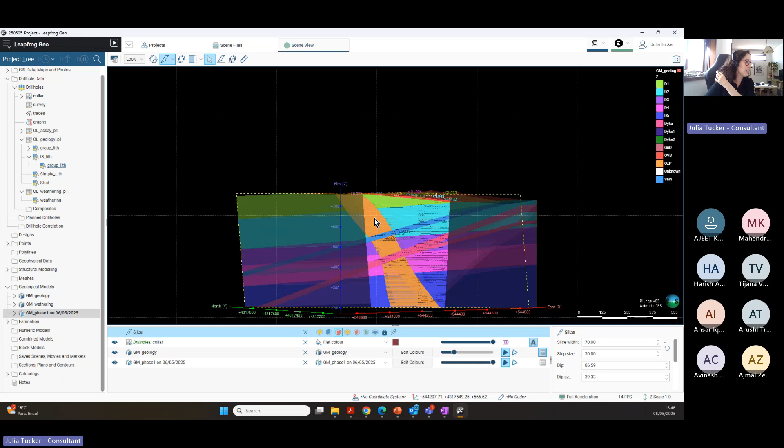So if we just make this a bit transparent, we can try to do a slice on it and see how things are actually continuing. So what that means is that if you have a good visualization of your geology, if you can do the first surfaces and edit them in the best way for you to understand it, you will also be able to always update your data without having to do everything once again.

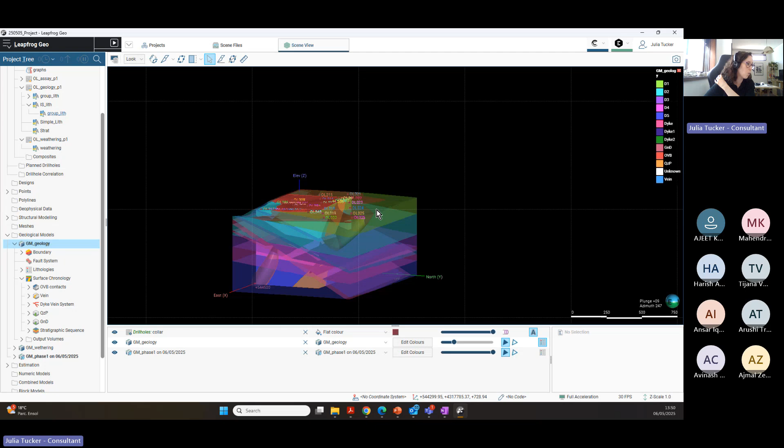What's important for you to be aware of is the chronology. It's the only thing that you must be aware of. If you are adding any lithology, be aware of the chronology. If the chronology is changing, it's because the logic of your system is also changing. So we have to think here with logic, always get a logical thought.

So if we are starting in one way, how are we going to get to the way that I wanted? If I need to add more information, how am I going to do that in the way I wanted? Remember, your result is only as good as your data and your analysis. So if you know there is new lithology and know how to do these new surfaces, or you are not afraid to try things out, this is not going to be a problem for you to update your phase one model.

The worst case scenario here would be for you to try to do your geological model again. But once you have the ability to do that, you can actually build a geological model in 2 hours.

I think I have answered you already, because you asked about the new lithology when we are trying to input if we have appended a new lithology with this drill hole data, right? Yes. Yeah, so that will be mainly it. Are you able to understand? Yes, yes. Well, thank you very much for your question.

For an OMF kind of file, we will have to go right here on the settings and go into OMF import, and on this place, we are going to go for the geological modeling pit shells and just select the OMF right here and open it. So we just need to select it, subscribe, and do the OK.

So we have here being processed, and we have here the design of our simple pit surface. So please tell me if somebody wasn't able to import this surface right here.

So we have here our example of open pit, and now we have how to take a look in our model to see if this was going to make sense or not. So we have here our open pits, and we can check that to fit our open pits in our geological model, we still need to make the boundary larger. And every time we make the boundary larger, we are also increasing the processing time a little bit.

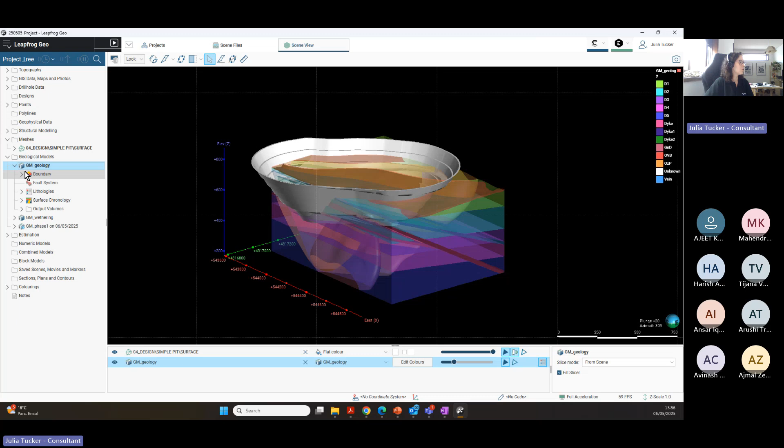So right here, what I wanted to show you is that we will have to do this enlargement of the boundary, and this is something for you to check on your projects too, if things are fitting, because if they are not, you just need to come back to the boundary and change it by expanding it just a little bit so it can cover all the open pits without any trouble. And then we can just click OK.

So now we're just going to take out everything that we have here on scene, and just the pit is going to be here because we are processing now all the rest of it.

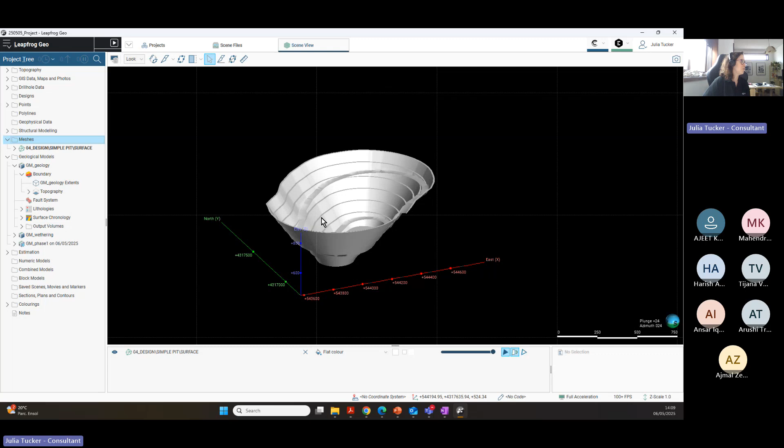Coming back with our model, now we are going to create our open pit drawing. Remember this could be imported from the designs or from the OMF. Here in the settings on Leapfrog, when you click this corner, OMF is the only import option. If you want to import different kinds of designs, use import designs, and you'll see the options available there. You could also import meshes, but not in OMF format, so that supports other formats, while OMF specifically is called separately.

Now that we have our surface, our geological model starts again, so we can create a new geological model. In this new model, our base lithology is going to be none, because we don't have any lithology to search for - we just want to know what is inside the pit and what is outside the pit. This way we can already do a volume calculation of what's inside and outside the pit. We built a geological model today, and we're going to combine it with another geological model we're going to build now, but this one is totally categorical for what is inside and outside a pit.

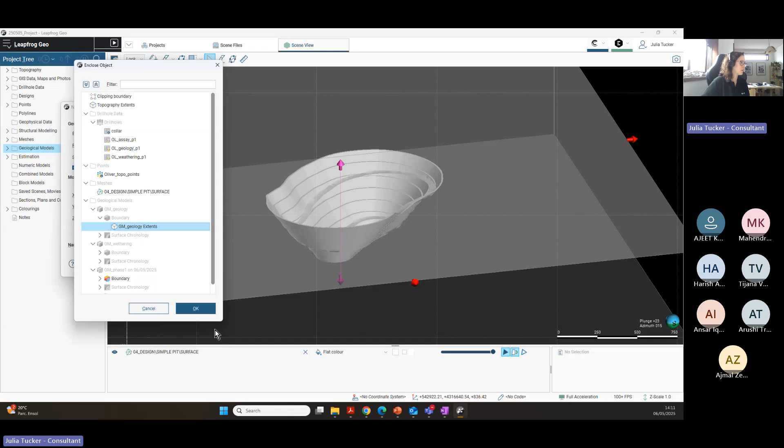So we have the pit here, and our name is going to be 'geological model open pit'. Now to enclose the object, we're going to choose the boundary we have for our geology - we just need to select the geology extents we already fixed. It seems to be approaching everything, and then we can click OK.

Once we have it, let's take a look in our project tree at the GM open pit - just drag and drop. We have here the volume, the total volume, which is very important for us. The first important part, the boundary, is right. The resolution is right - we've set it to the same resolution as our geological model. Now we just need to start creating our little model about what's inside and what's outside the pits, so we can combine it with our information from phase 1 and 2.

Now that we have our block model, we just need to go to the open pits, then the lithologies, and double click on it. Once we double click the lithologies, we go to the plus sign where I am going to describe 'pit' and 'outside pit'.

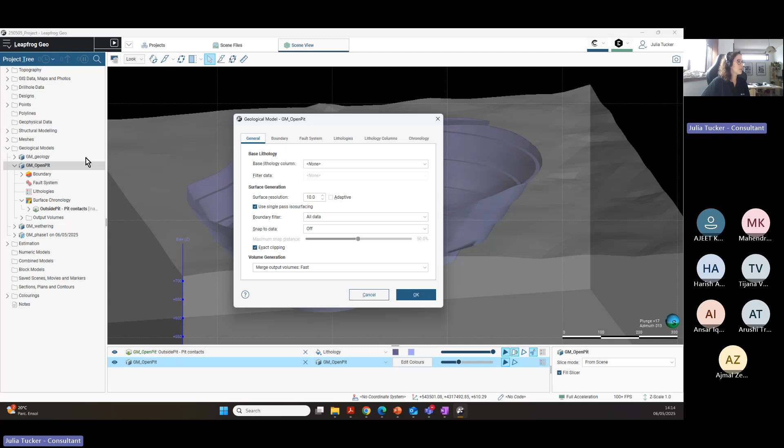We need to go for the geological model, double click on it, and input now that we want to snap to data, all data, because in this case we are not using drilling, we are using a mesh, and also that we want it activated. So the base lithology is going to be the outside pit, and we just need to click on OK.

So right here we just need to input the pit, the outside pit, and we have the volumes that we needed. So if I want just to take a look on the pit, we could, and now we have a volume for our pits.

So I could just go here on the pits and do evaluations, and I would be able to do evaluation if I have any numerical number already attached to it. And we can also do the properties, and on the properties is where we are going to get the volume. We could get it on the evaluation if we already have attached the numerical numbers and numerical modeling that we are going to dive in tomorrow.

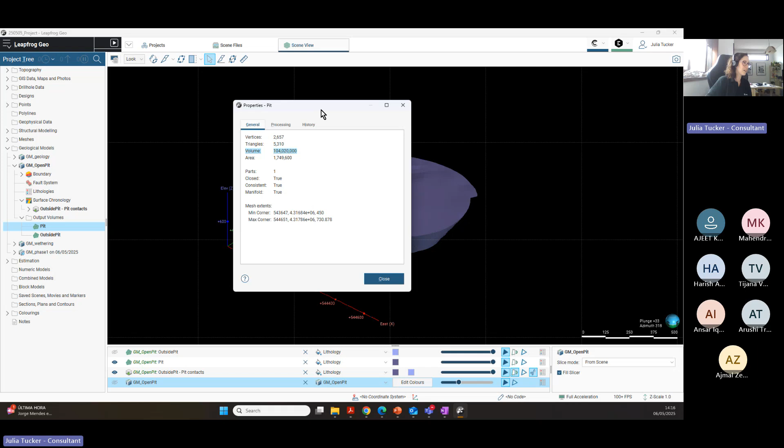Tomorrow we are going to speak about when we are trying to input categorical data and numerical data together, when we are working just with numerical data, and what we have as statistical tools for making our projects better, and also to indicate where we have more or less ore. So this part that we had tried out yesterday and today is about data insertion, correction, and categorical modelling.

So we have here basically a lot of information, and now we are just going to combine this information. We already have the total volume, but we could get now the volume for each lithology. So we just need to go for the combined models.

I'm just going to make everything clear now. On the combined models right here, we can do a new combined model, and I can choose the one that I'm going to use. We are going to use the geology and the open pit one, and the combined model will be open pit and geology.

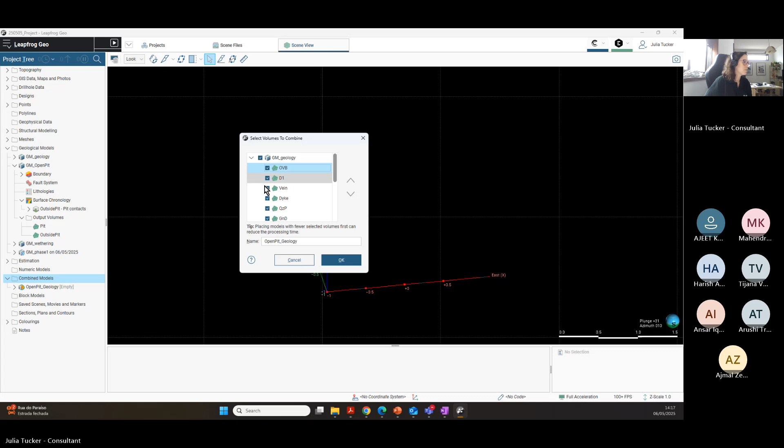And just clicking on OK. So now we need just to select the volumes that we want to combine. In our case, we just want the inside pit, we don't need anything that is on the outside. And we can select every single lithology if you want, and just click on OK.

So now we are processing, and we have already our model combined. So we have here our little legend and the output volumes right here.

So on those volumes, you could export just this volume. If you wanted, you can change the colors, you can check the property where you can see the volume and the area. You can extract the mesh parts, and you can do evaluations once we have already something from the numbers.

So the numbers that we have right here are the assays for copper and gold, and we are going to check tomorrow how we are going to do, from a first sight, to understand what is attached to what.

So we have still spare time today, so I could start talking about it if you want, if it's not too much information for you. But if you prefer just that we talk about today, and if there is any doubt about it, if you want to comment or add something, please.

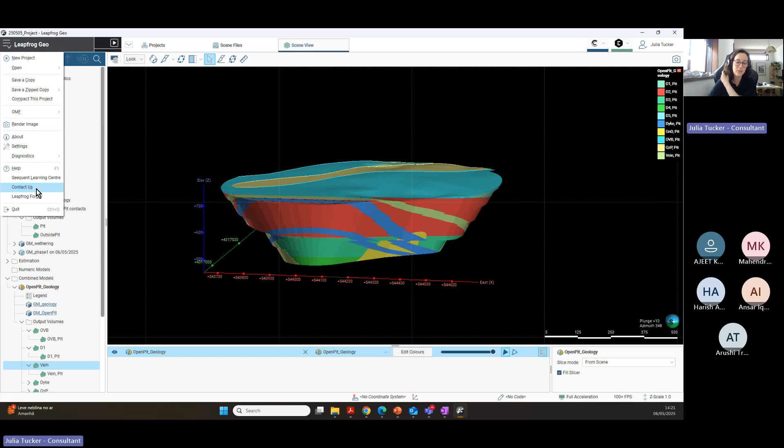And this is the perfect workflow for you, because you have the tools that you need, and now you just need to go and build your project little by little. So since it's a lot of information, I am going to leave it here for today.